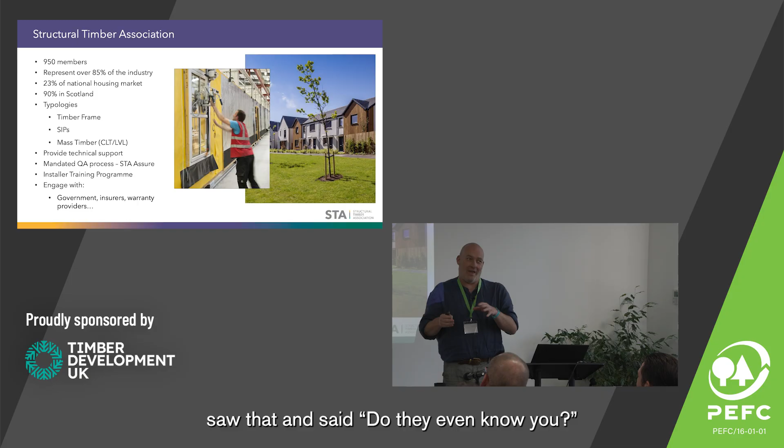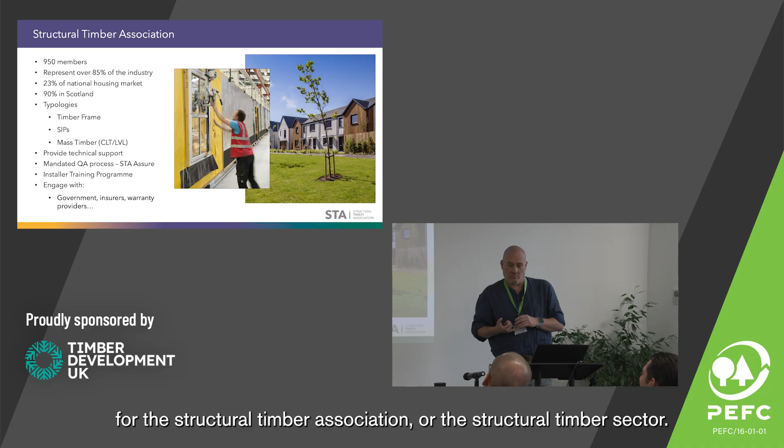Moving onwards. Structural Timber Association, very briefly, we are the trade association for the structural timber sector. Our membership are drawn from the supply chain, primarily the manufacturers, designers and constructors of timber systems. We've got a big share of the market in membership, as you would expect. And we represent the three main typologies: timber frame, SIPs and CLT.

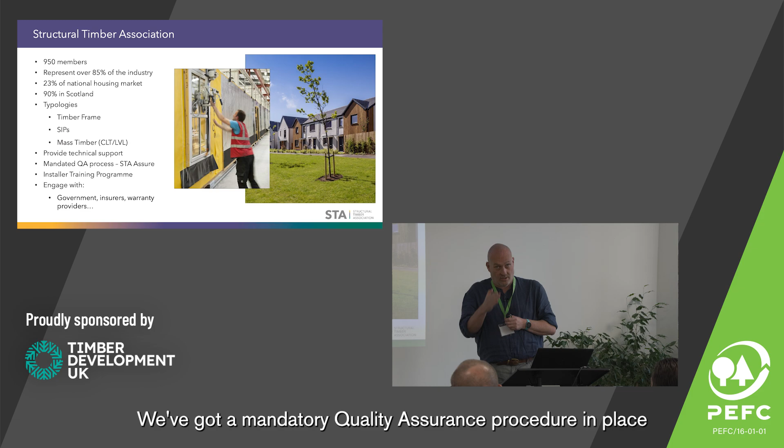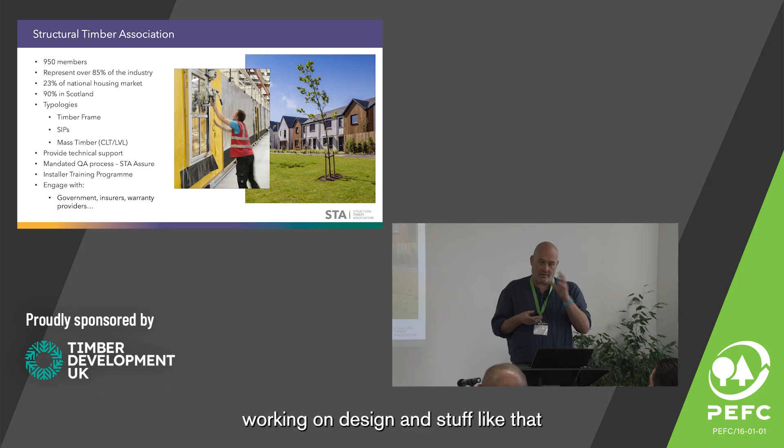We provide technical support to the association, some of which is through me, some of which is subcontracted. We've got a mandatory quality assurance procedure in place for members, which is ratcheting up in its ferocity from January, which is a good thing. We have trained installers for a scheme there, we're working on design stuff at the minute. And I suppose our mainstay is engagement.

We spend a lot of time trying to talk to government, don't always want to listen, don't always want to hear, but we try to spend a lot of time doing that and then link with the rest of the stakeholders in the sector. So I'm going to be talking about what's on the top two lines here.

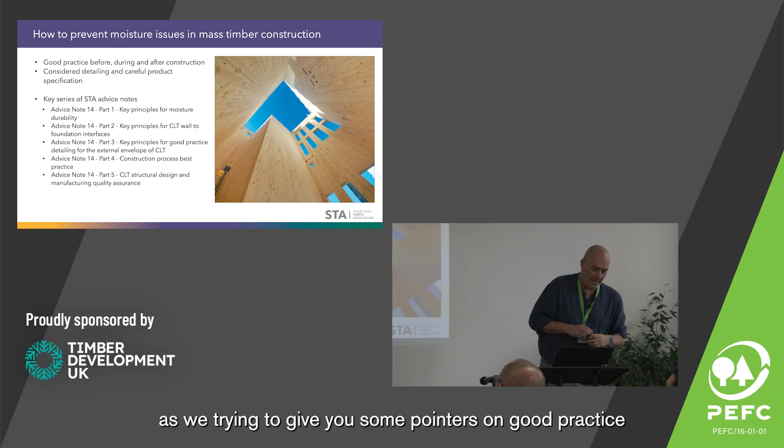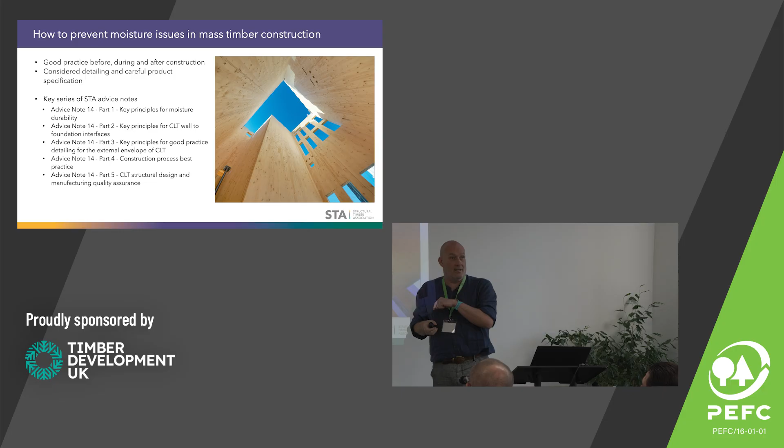Trying to give you some pointers on good practice and things like that. I'll point you at five publications that the association has written and prepared that will help steer you through this sort of thing, if you are not already aware of it. And now I'm going to get into the meat of the talk.

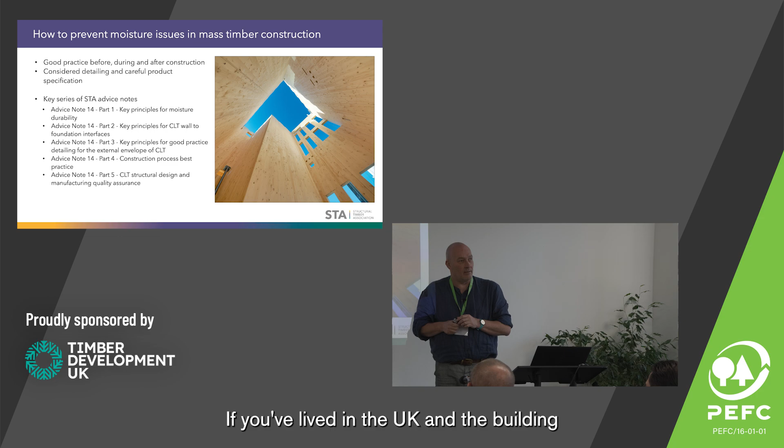So, stand up if you've lived in the UK in a building and you've never had an issue with water. And I've asked it that way because no one's ever going to stand up. We've all had some sort of problem with a leak in our building, and today is about trying to help you not have those problems, about help us not have those problems.

Some of this might be a bit controversial. I hope it's not, it shouldn't be. Some of it might be things that you're not doing at the minute that maybe I think you should.

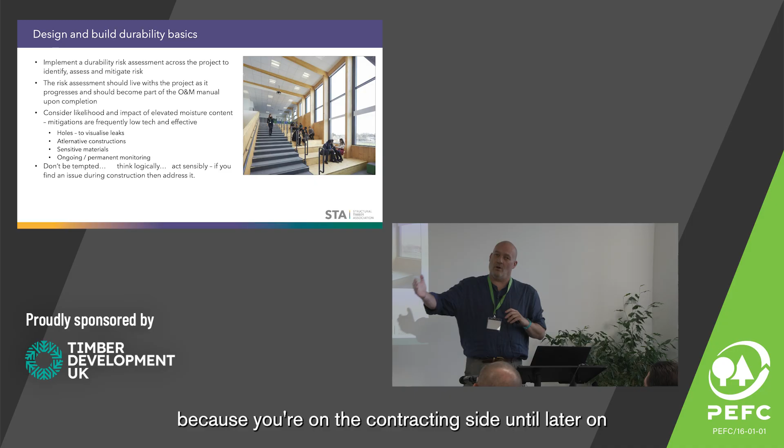Okay, first one, implement a durability or a design durability risk assessment. Start it at the very beginning of the project. So for some of you, you're not going to see this because you're on the contracting side until later on. Some of you that are on the client and design side, this is what should be in place at the very initiation of the project.

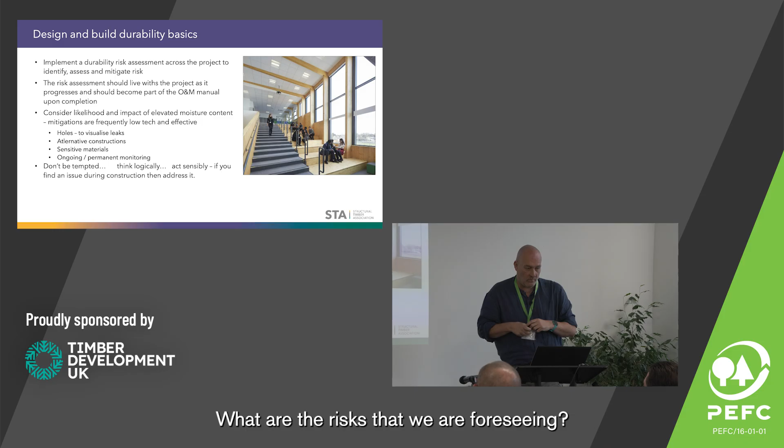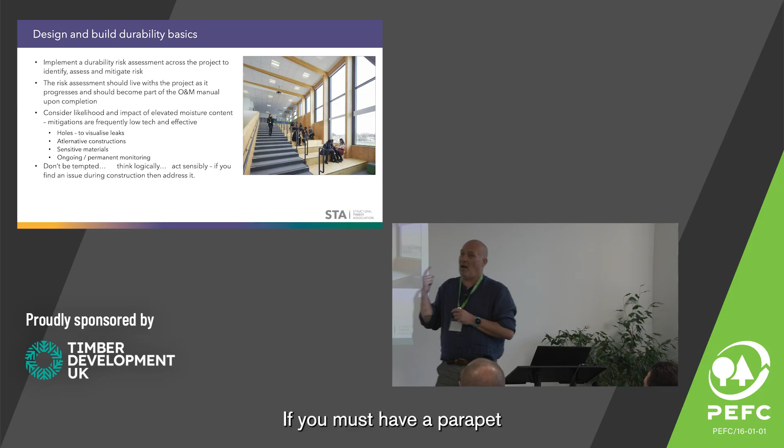What are we designing? What are the risks that we're foreseeing? What are the consequences? What can we do about those? A simple little example: we've seen parapet construction so far. We've seen how water can accumulate behind parapet constructions. Don't do it. What about if we just didn't design a parapet on the building? Have something else instead. If you must have a parapet because of the planning, for design and planning reasons, then how can we stop moisture becoming a problem in that area?

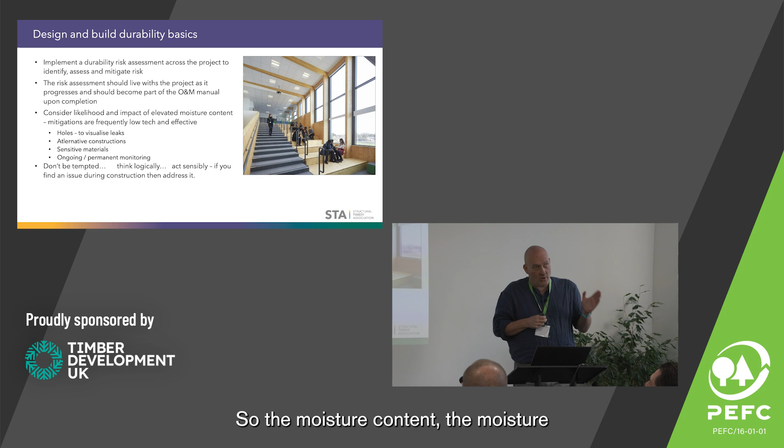So the moisture content, the moisture risk assessment should live with the job. Some of it will be moisture measurement on site, and I'll come back to that on the next slide.

So, on the basis that we're all learning, me especially, and we're all limited, some of us more than others, what about holes to visualise leaks?

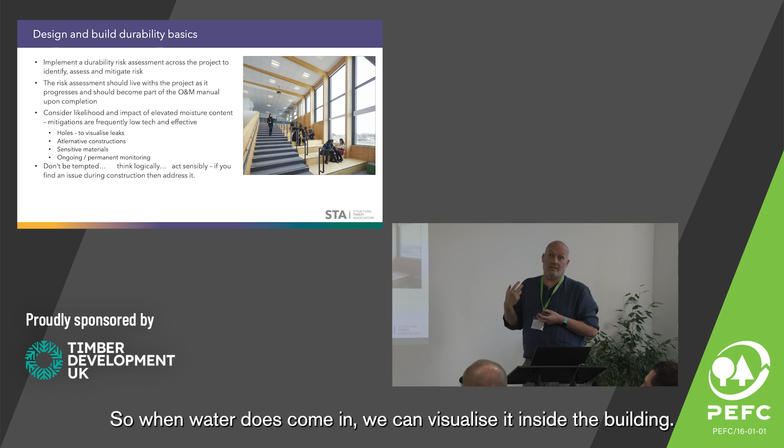If you're going to have a leak in a building, and we will, let's put a hole in the right place so that when water does come in, we can visualise it inside the building. We see a damaged surface finish, and then we know, hang on, we've got a problem, we can go and fix it.

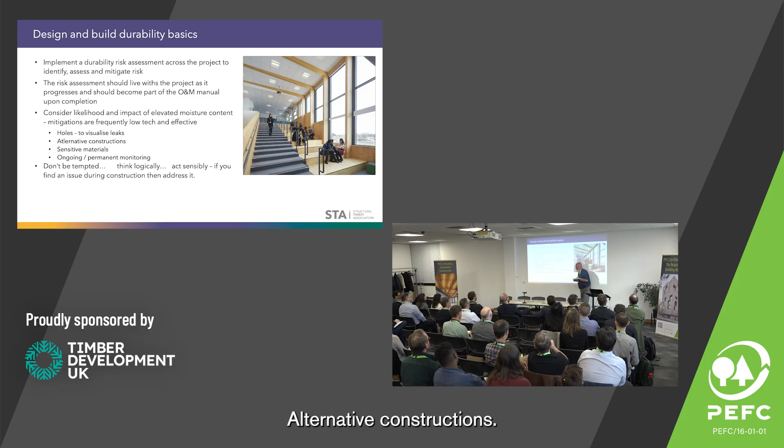Alternative constructions. So maybe don't use CLT for some of the areas that are most high risk. Use an alternative product in that area. I'll come back to that as well.

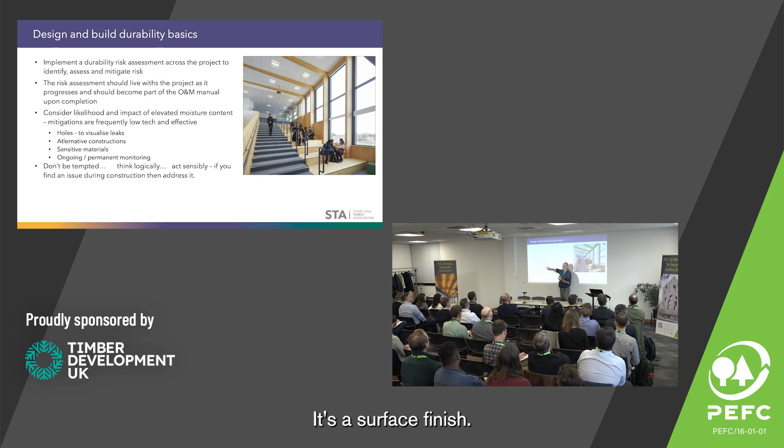I like this one. Use a sensitive material as a surface finish, something that's going to give you a tell. If I've got wet, I've displayed that. Maybe I've gone soft and spongy, so that you don't have to wait for whatever was on the roof of the building to tell you what's going on.

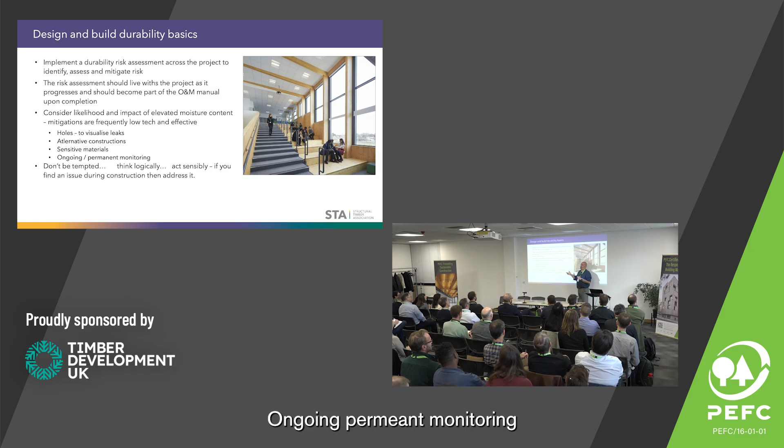Maybe, and I know some of you, this plays right into your hand, some of you, Mr. Sharples, ongoing permanent monitoring in the building. Something that lives with the building for many, many years, if not the rest of its life.

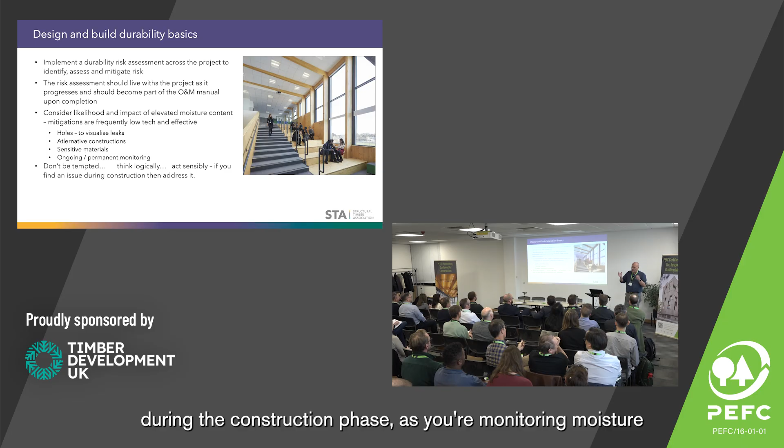And what I would say is, don't be tempted to take shortcuts. They will bite you. We know that, we've seen that. They will bite you in the bum, so don't be tempted to take them. Think logically in what you're doing and act sensibly. And that applies during the design phase, during the construction phase, as you're monitoring moisture. And I think if you're not monitoring moisture, you need your bumps feeling.

And then if you find an issue during the construction process, before you close up the building, address it. Keep CLT warm, generally. I know you'll all be going, yeah Paul, but how many times have you not done that? And how many times has it caused you problems?

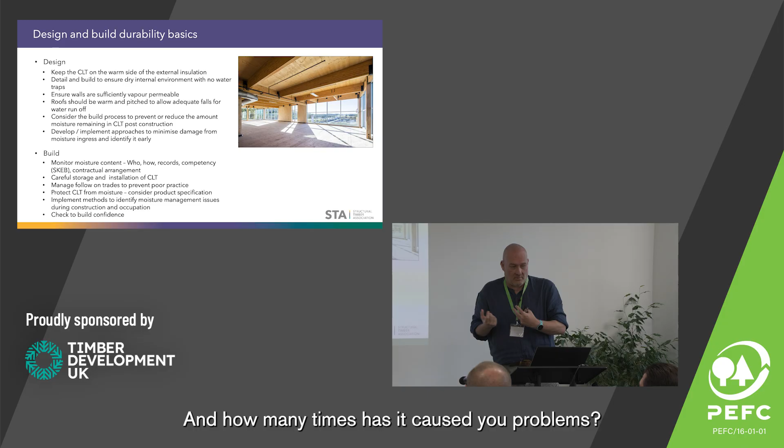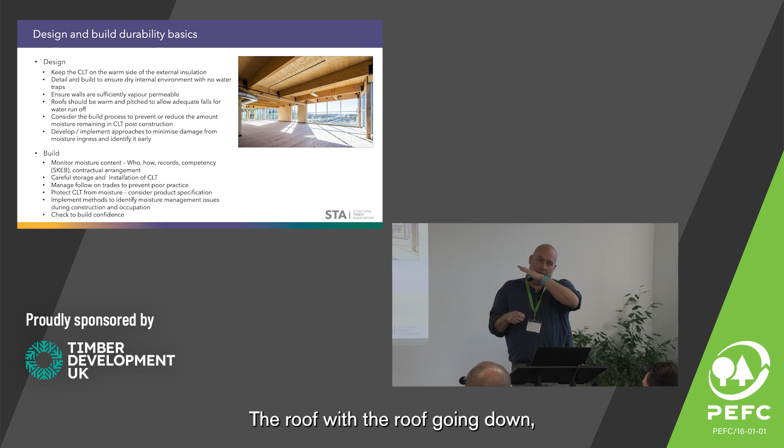And consider detailing to avoid water traps. Phil showed you a picture earlier with a parapet roof, with the roof going down to form a little valley. Perfect water trap. Water gets in there, tracks up the building.

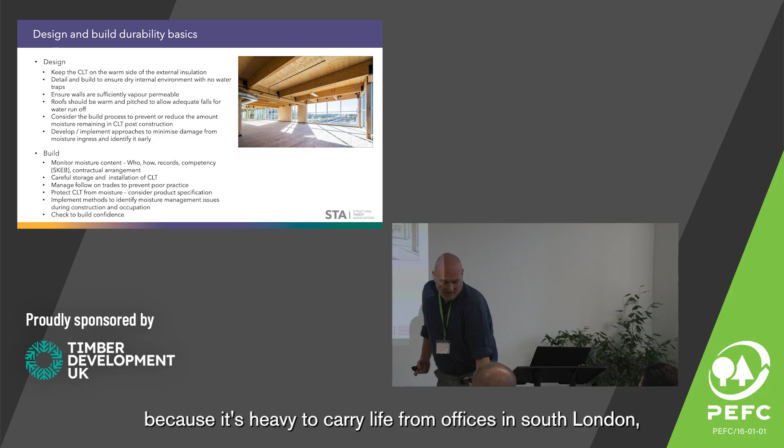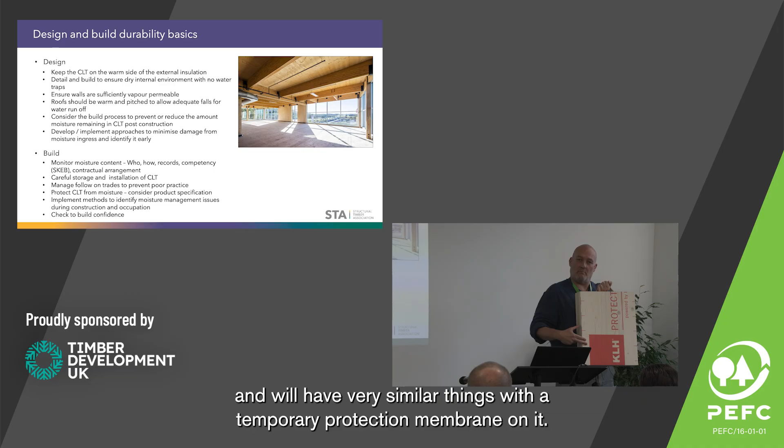Consider the build process to reduce the amount of water remaining in CLT post-construction. Now, I know he's not brought this here for my benefit, because it's heavy to carry all the way from offices in South London, but Nick from KLH, they've got this product, from KLH. And other manufacturers do exist and will have very similar things with a temporary protection membrane on it. Why not specify that on your jobs and make life simpler, reduce the amount of moisture that can get in, and also give yourselves a chance to get the building dry afterwards.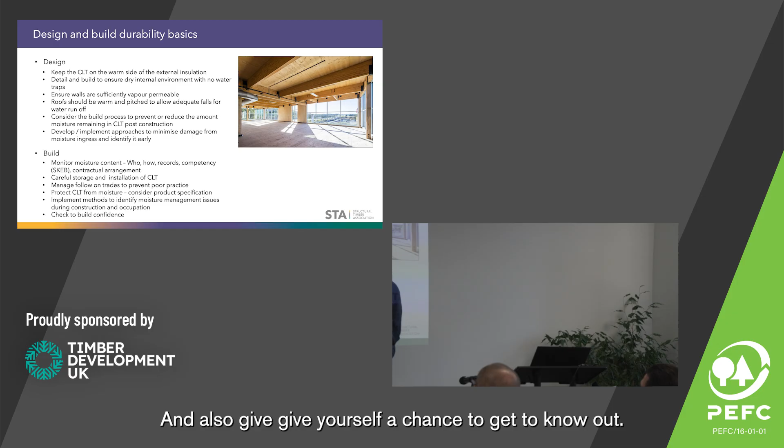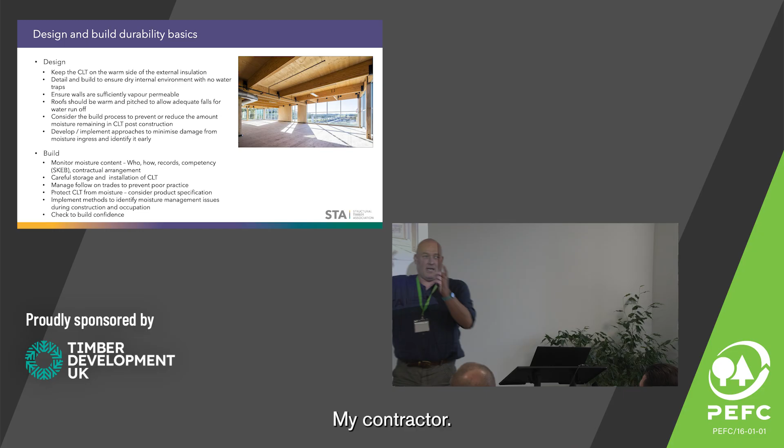I heard the words moisture management plan, I think someone called it earlier. Yeah, great idea. Who's doing it? So where does it sit? We've got some people in here from Opera who work on the client side of things. Should they be doing it? Should they be organising it? Is it something for main contractor? Is it something for subcontractor? Is it something for someone on the client side to be doing?

But when it comes to measuring moisture content, who's doing it? How are they doing it? Where are they doing it? What happens to the records? And the critical part in all of this is competency.

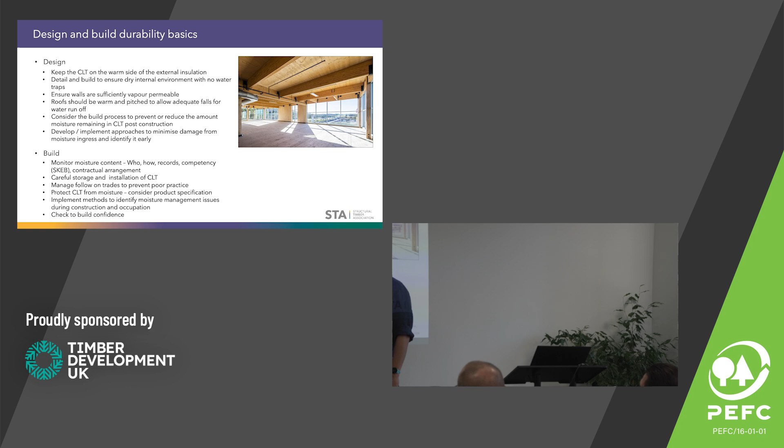So there's another, I'm trying to go around the subsets of people in the room. There's another group of people in the room who have spent quite a lot of time looking at CLT buildings with issues. You don't really want to employ them to do ongoing monitoring for you on a weekly basis because it's too expensive. So you need someone who's going to be on site on a regular basis to do it, but they need to be, so that they're affordable, they need to have the right skills, knowledge, experience and behaviour to do the job properly, and they could absolutely be trained by the other people in this room to do that for you.

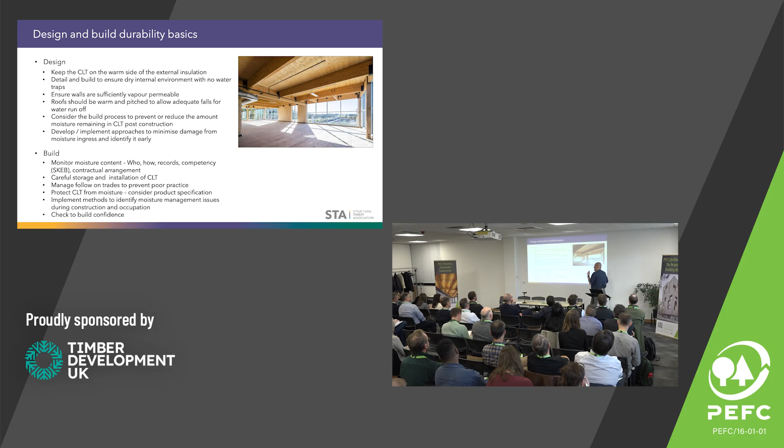If you check these things and find you haven't got a problem, then it builds confidence for you, for the rest of the team involved in the job.

Typical CLT external walls. Rigid insulation. Is that really a good idea?

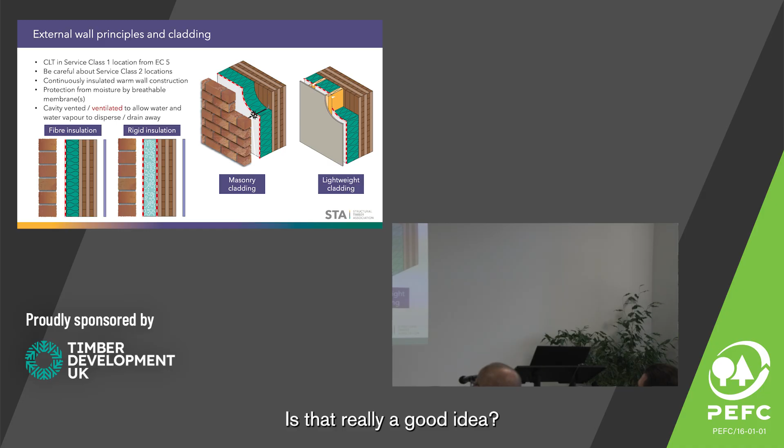If you are going to go rigid insulation, then I've got two membranes on this. One straight on the face of the CLT. These are breathable membranes in this case. One on the outside of the insulation. And on this version, with fibre, I don't necessarily need one there. In my head, that membrane's not that expensive. Get it on there to protect the structure during the construction process.

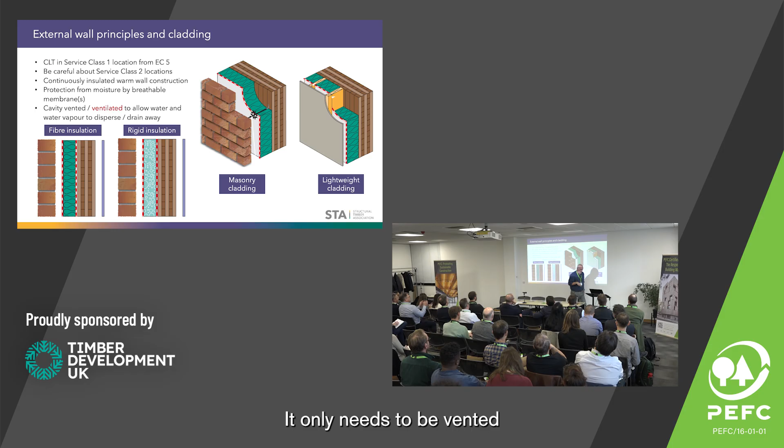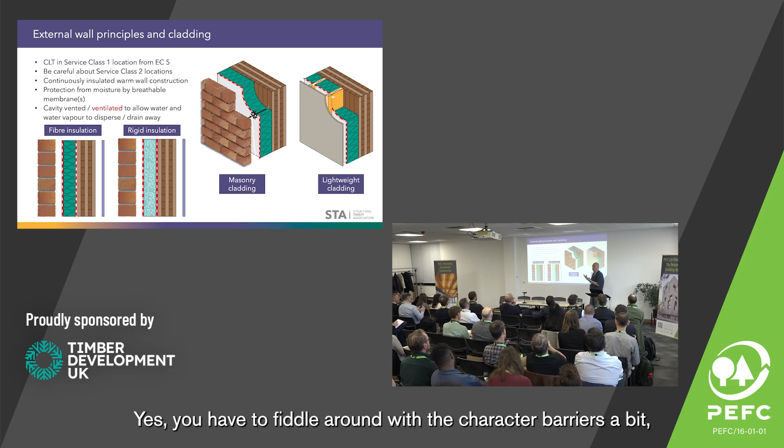Theoretically, if you've got masonry cladding, and I know a lot of buildings won't, but if you have masonry cladding, then it only needs to be vented. Add more ventilation to it, then you've got more opportunity for drying if it's needed, and don't take the risk. Yes, you'll have to fiddle around with your cavity barriers a bit, but it's a much better idea in my opinion.

You're going to get more opinion, you're going to get a lot of opinion from now, or some opinion.

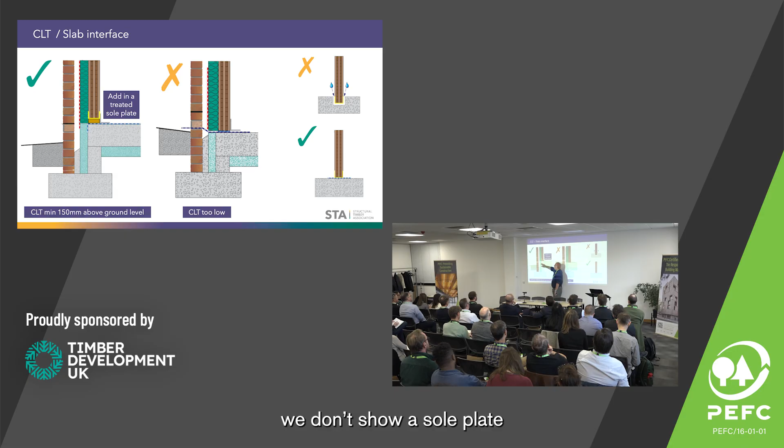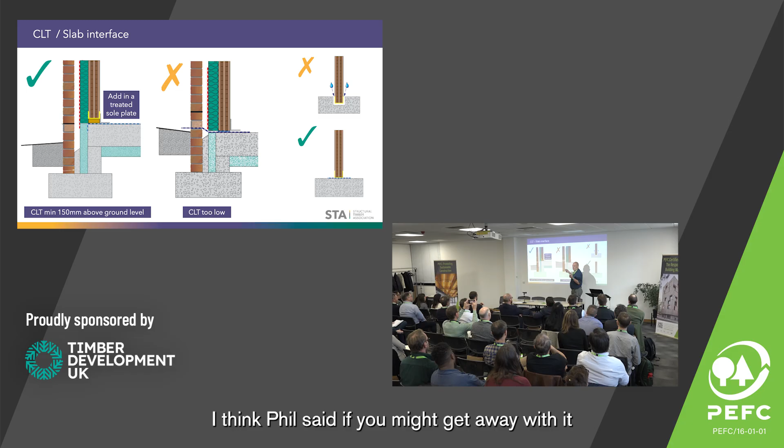In the STA publications, we don't show a sole plate. Why not? In my head, it provides an opportunity to set out the building, to level the building, and this is made from treated timber. I've already ensured that I'm 150 above the ground minimum, and I'm not doing it if it's less. Don't design it if it's less. This is not a good idea. I think Phil said you might get away with it, but you also might not get away with it.

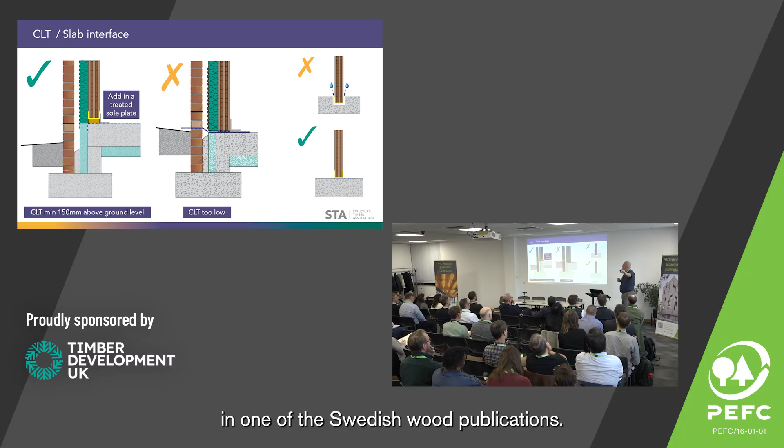We've heard about pockets from Martin. No, stop doing those. We at least want it like that. And then there was a nice illustration in one of the Swedish wood publications of a nice little metal plinth lifting a big column up. All of these things are a good idea. You might get away with it, you might not. You don't want to find out too late on in the process.

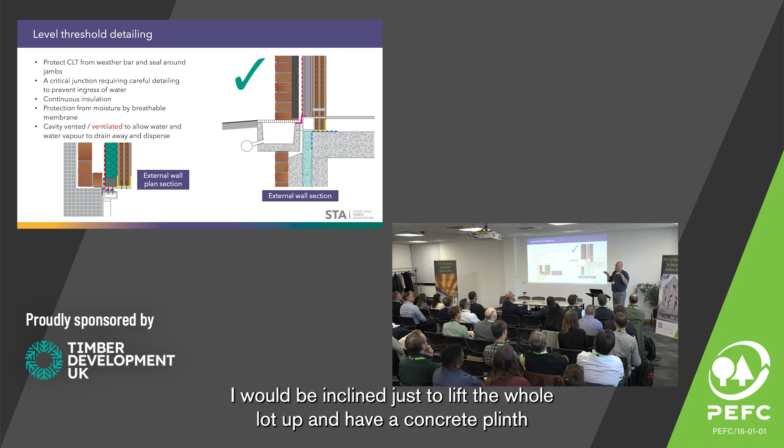Level thresholds. So this is an example of perhaps how you can do it to avoid a problem. But in my head, there's still a residual risk here. I'd be inclined just to lift the whole lot up and have a concrete plinth. It's a warm wall construction. I'm insulated externally anyway. I can take that insulation down past my threshold, lift the whole thing up, don't have a problem.

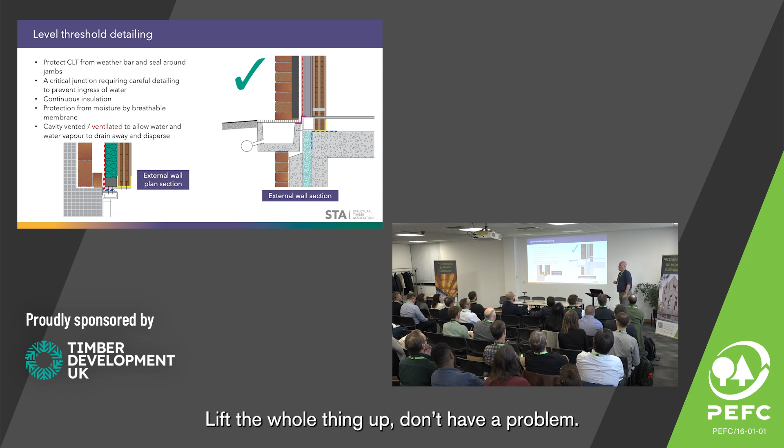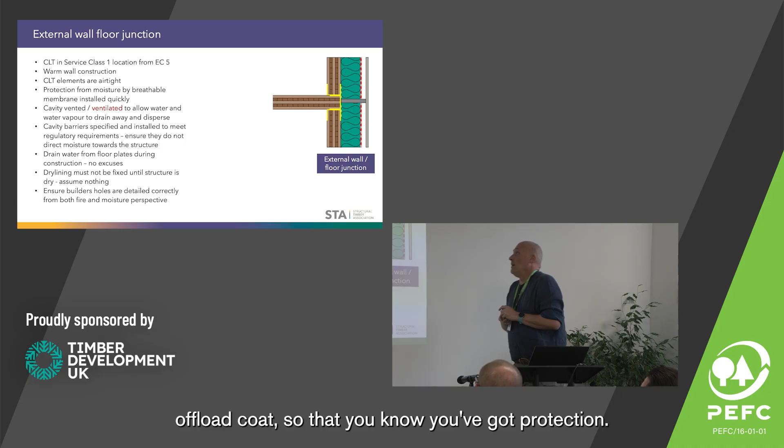External walls. You'll keep seeing my yellow lines here. Some of them are from the publication, some I've added in, because I think from what we know now, we want a bit more end sealing going on. Having the end sealing in position is a good idea. It can be done in a factory. Sounds nice, sounds controllable, sounds as though it can be quality assured. Or the alternative is you get someone to do it on site. If you're going to do it on site, you absolutely want to be doing it, in my simple little head, as the stuff arrives. Offload, coat, offload, coat, offload, coat. So that you know you've got protection to at least that area where you've got the exposed end grain, which we've heard all about is the absolute critical bit.

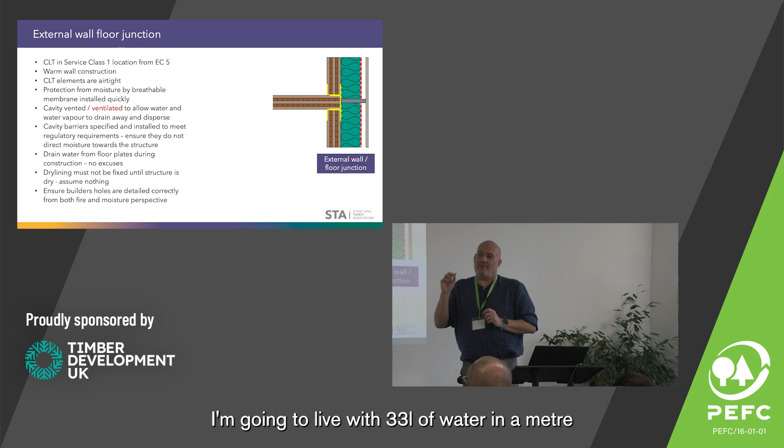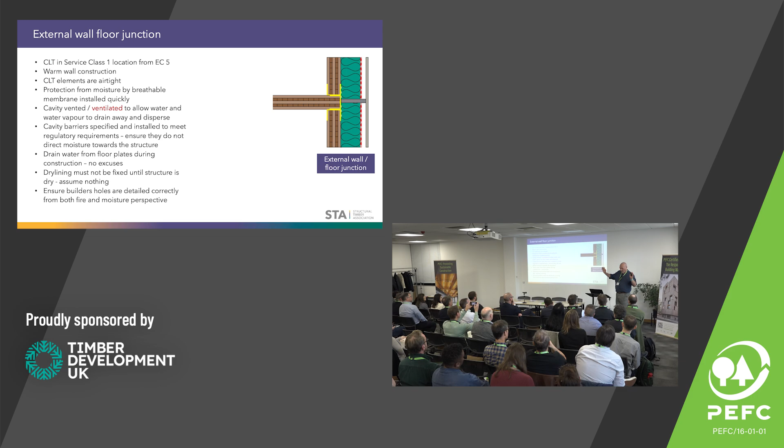I think I'm going to live with 33 litres of water in a metre squared of surface area of panel for quite a few years after today. That's a lot. Okay, start doing stuff like this, start following good practice, and you won't have that sort of issue. Key one on here, I think: don't progress. It's wet, stop, deal with the consequence and dry the thing out. If you're covering up wet material, you're going to get the problems that we've heard about earlier.

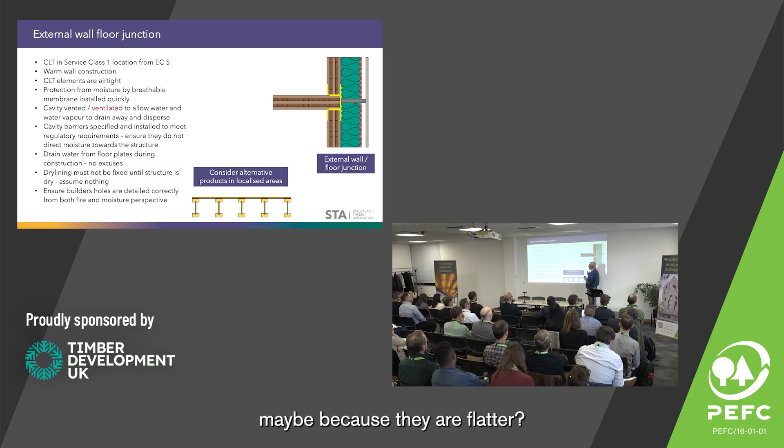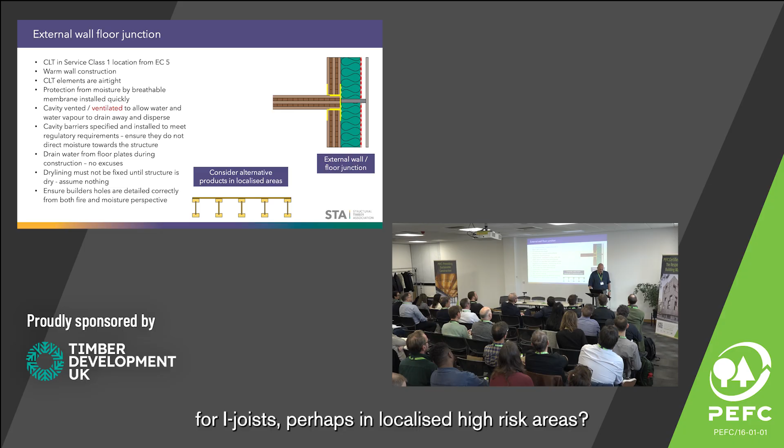How else can we do this? Localised areas. The areas that are higher risk, maybe because they're flatter, and this is a floor we're talking about now, or because perhaps it's a bathroom in a school. So can we swap out solid timber for I-joists, perhaps in localised high-risk areas? Or is this one of the places where we can include a sensitive material? Something that might be, if it gets a bit wet, it's going to go spongy straight away. So we've got to tell, so we know what's happening with the building.

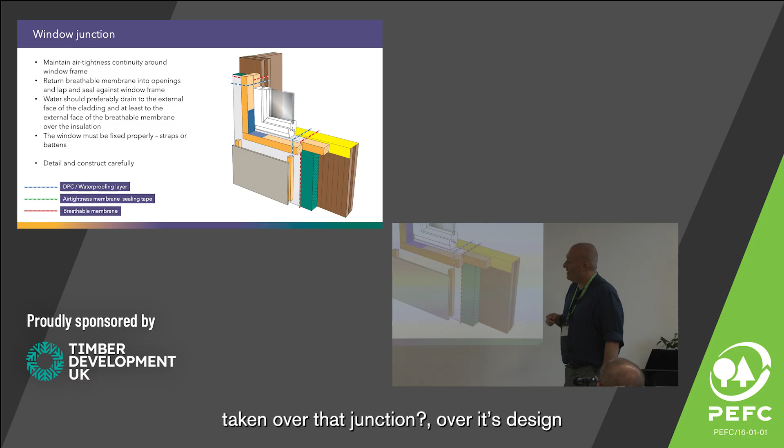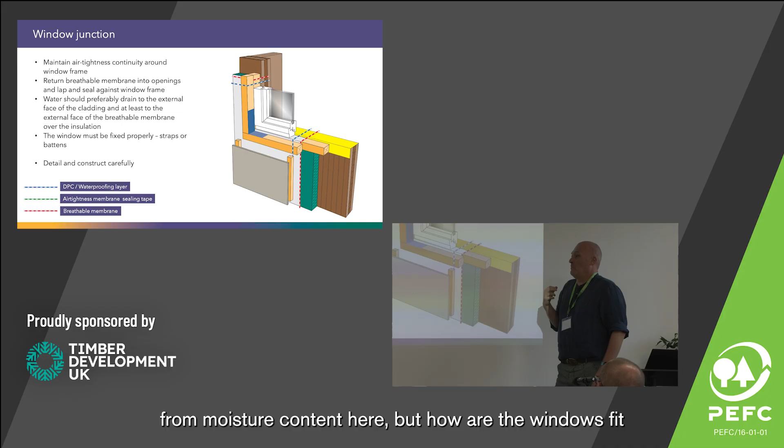Window junctions. Holes in buildings, fill them with windows. Is enough care taken over that junction, over its design, over how it's detailed, the products used, and then who's installing the windows, taking responsibility for that. I'm probably straying a bit from moisture content here, but how are the windows fixed? You know, silly little straps. Are the straps adequate? Have they been designed? Can it be shown to be adequate?

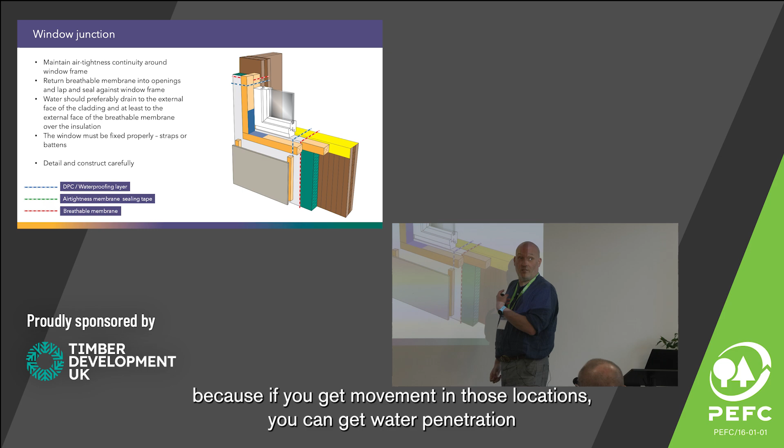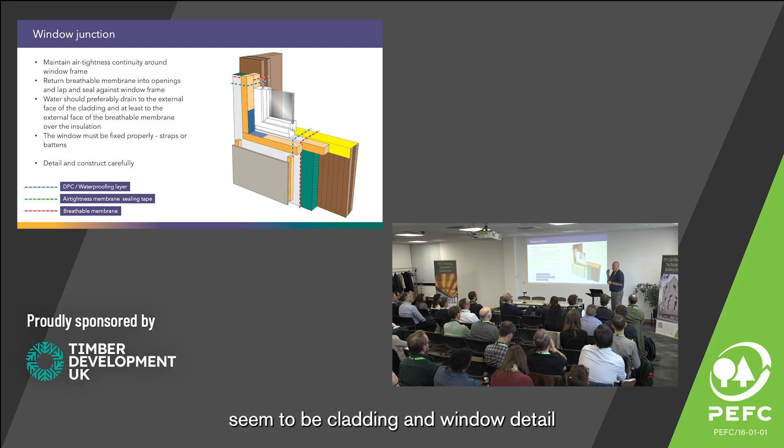Are we fixing to timber battens? Are they fixed properly to support big, heavy windows? And I suppose it is linked to moisture, because if you get movement in those locations, you're going to get water penetration. Have the window designed so that it's going to throw moisture outside of the building, or at the very least down a cavity, but preferably outside of the building. The challenge here, I would say, is an architectural one firstly, and then a construction one, because cladding and window details seem to be, to me, an endless source of variation. You almost don't see them the same. There's very, very little standardisation in place for that sort of thing.

So detail and construct this element—I should have put that up a little while ago—to throw water outside of the building.

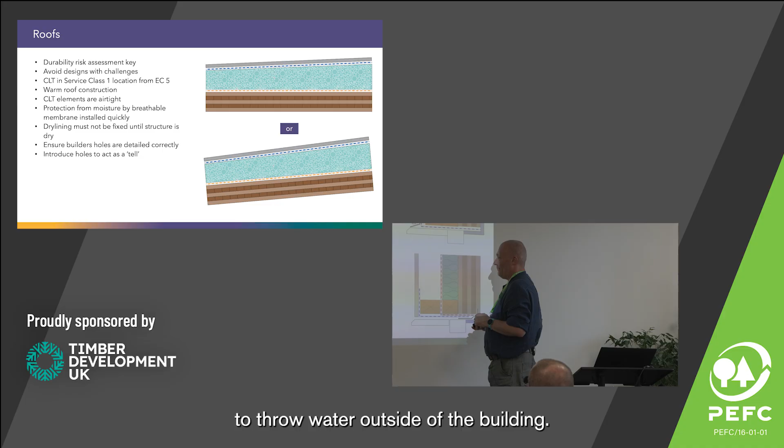Flat roofs. Yeah, you can do it. Do you need to design a flat roof into the building? Does it need to be CLT? Could it be something else?

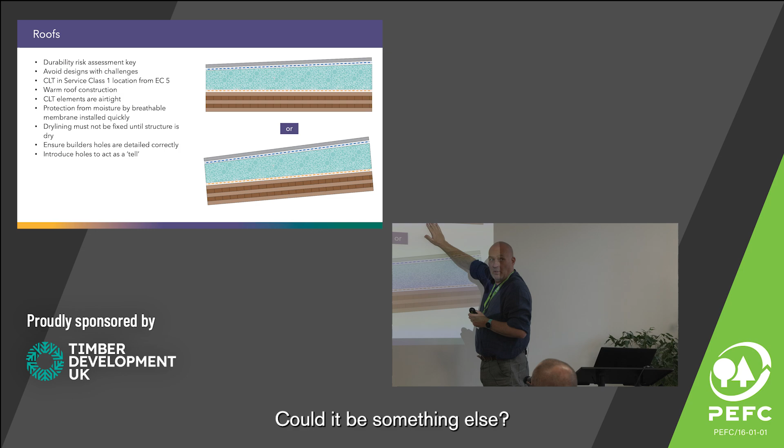Could we—and I know I've just rotated the thing in a bit of a clumsy way, but I'm graphically challenged, limited—put the CLT on a slope, and at the end of the slope at the bottom, put some holes in? I've got enough strength, a few holes big enough to let some water leak through. Isn't going to be a problem.

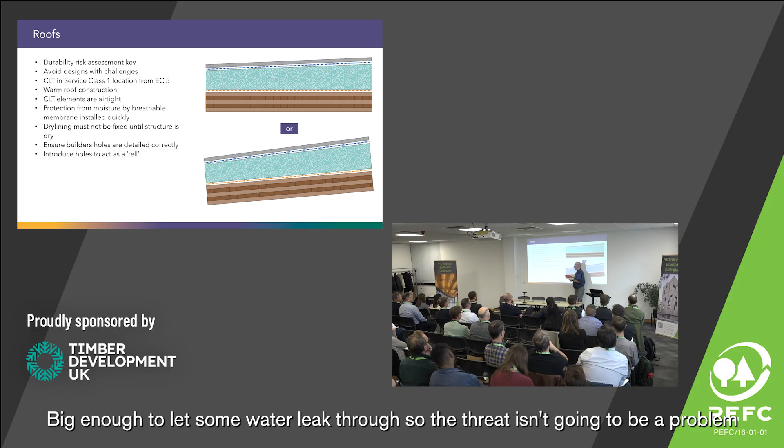I can even use those holes during the construction process to help me shed moisture out of the building. Put a temporary drain into them, some flat pipe or something, to get that moisture out during construction—because it is in the UK, because it will rain, it's not always going to be lovely and cold and crisp like today is.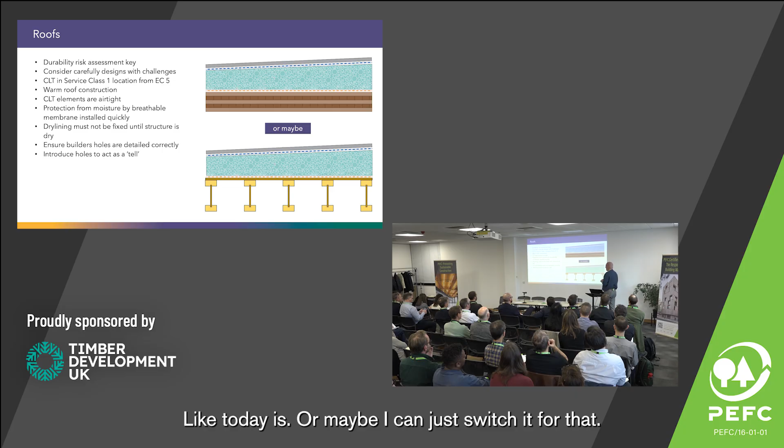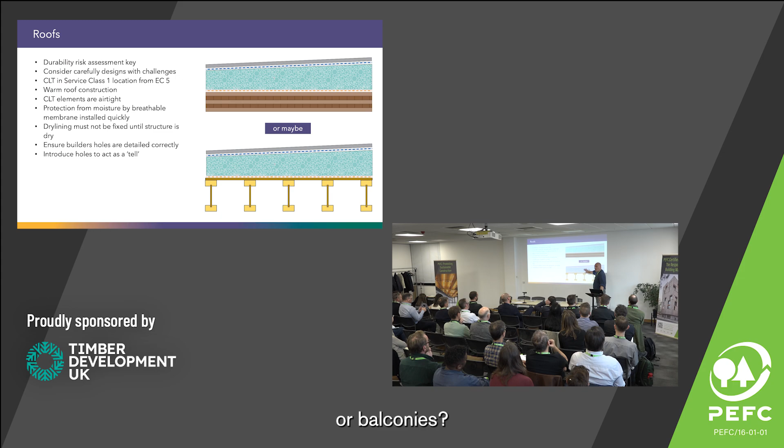Or maybe I could just switch it for that. And that doesn't just apply to balconies, it maybe doesn't just apply to bathrooms, but what about flat roofs? What about balconies? Is that another place where you might not want to use CLT? You might design something else, and it potentially isn't a timber material in that area.

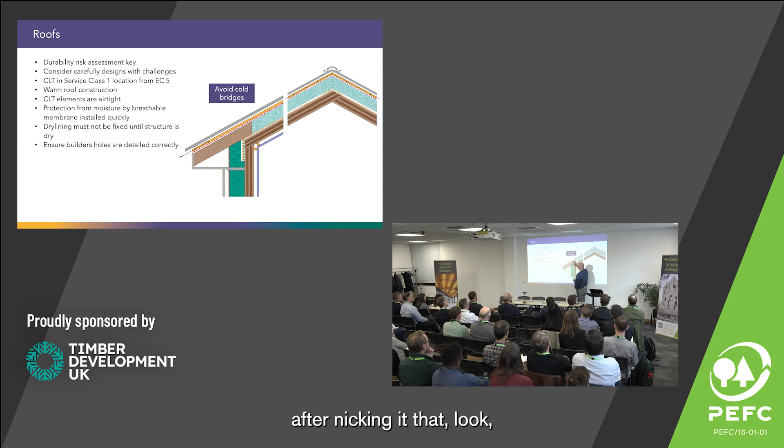Pitched roofs. I realised this after nicking it out of the book—a massive great big cold bridge there, unless you imply that that insulation is taken down.

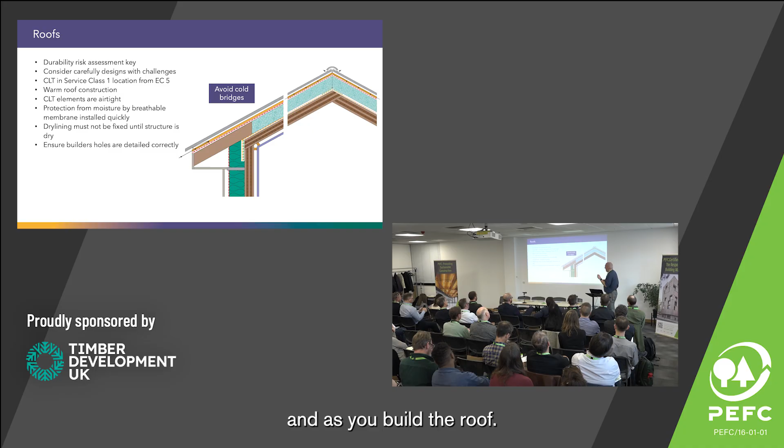So take that insulation down, and as you build the roof, get this membrane on as soon as you go—or use one of the clever temporary protection membranes that are now available in the marketplace.

That's me, just about done, I think. What have we done there? There we go, back to the beginning.

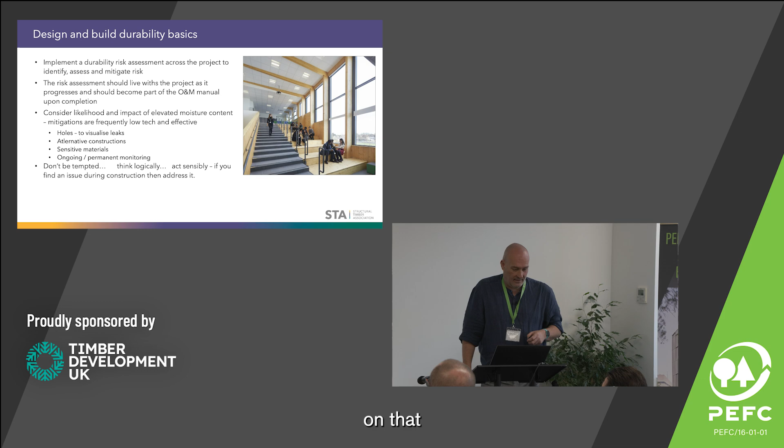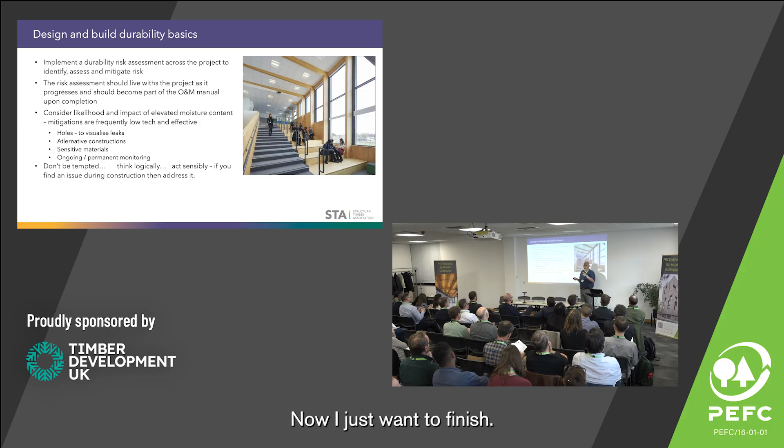Do this sort of thing: don't take risks, and think logically about the process. Now, I did just want to finish—I think I've got a little bit of time, because time's already blown. I'm looking to you to nod and join in.

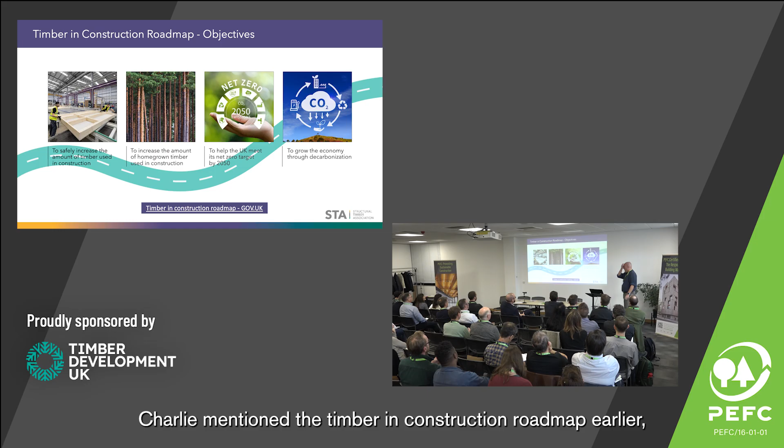I've given up now. Charlie mentioned the timber in construction roadmap earlier, and I think there's probably several people in the room who it has passed by somehow, who haven't heard about it, so I thought I'd stick in two slides on it.

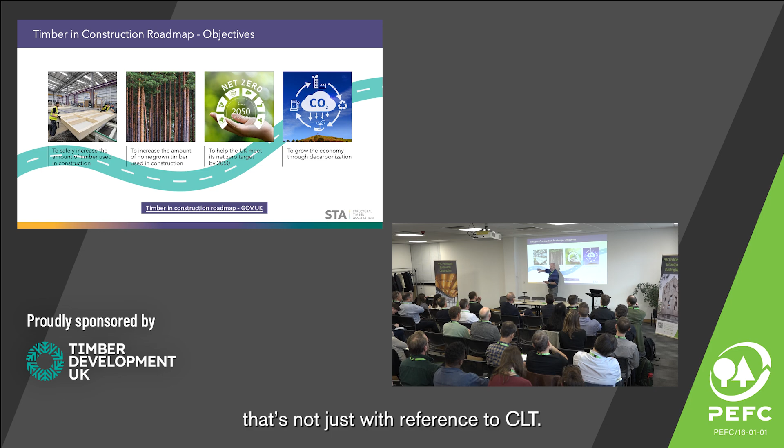The timber in construction roadmap is an initiative between government and industry. It was under the Sunak government. It looks now as though it's going to get buy-in from the new government—cross fingers, following the meeting the other week. It's got a few things in there, not just with reference to CLT or moisture, but some of the other challenges as well.

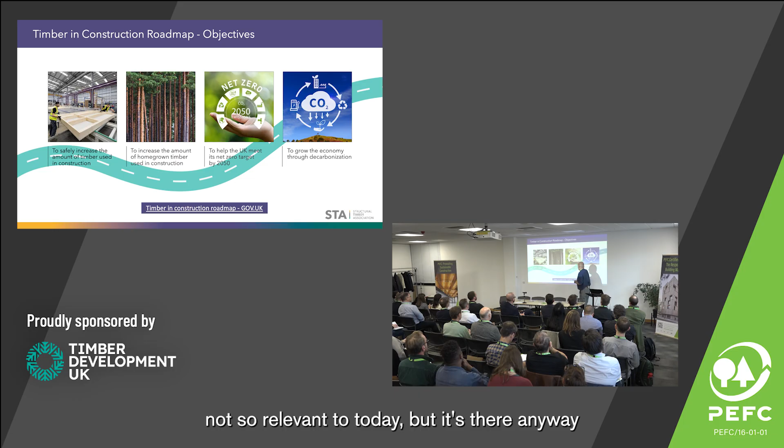Safely increase the amount of timber we use, increase the amount of homegrown timber—perhaps not so relevant for today, but it's there anyway—to help us meet our net zero target, which is why Part Z is critically important. We're not going to get that much further on operational energy, and then to help grow the economy through decarbonisation, through all the good work we're doing.

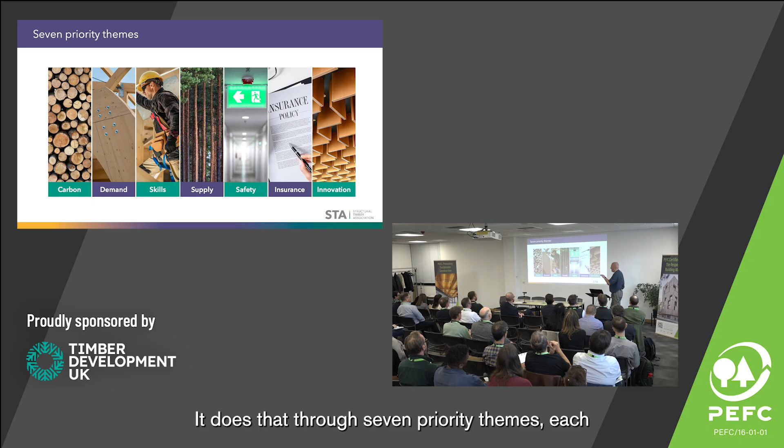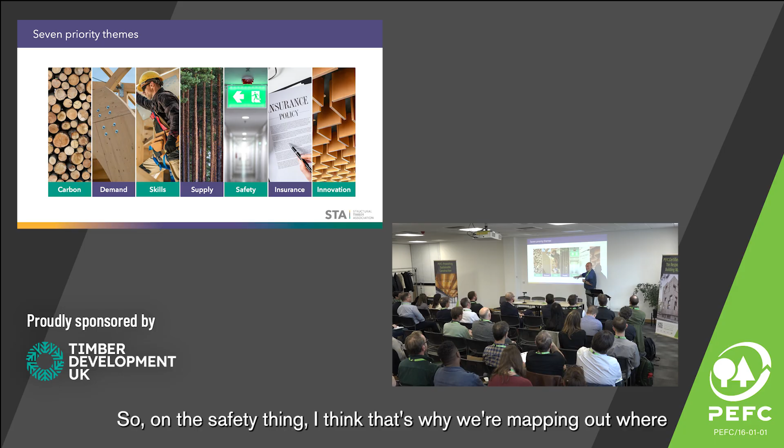It does that through 7 priority themes. Each theme has a list of actions underneath the titles. On the safety theme, I think that's where we're mapping out where all the CLT buildings are. On the carbon theme, it's improving the quality of EPDs that are available, increasing the number, improving the quality.

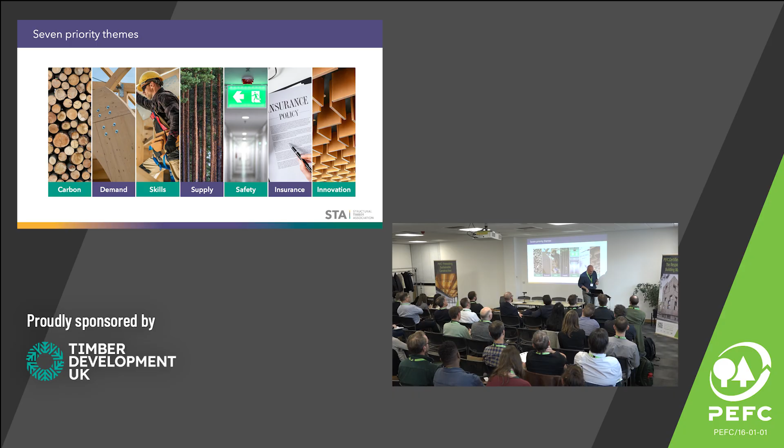Probably the biggest challenge in all of this is skills. Where are all these people coming from who need to construct buildings in the future? Years and years ago, I had a thing: the construction industry finds it hard to recruit because it's dull, dirty and dangerous. Working with CLT and other timber systems, I think we have the opportunity to change that.

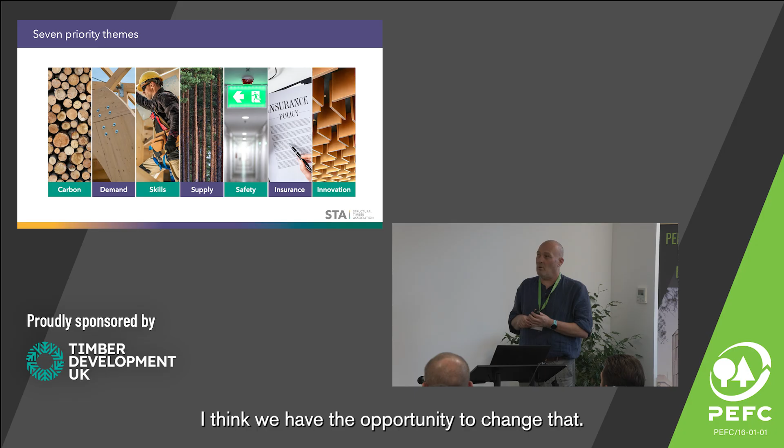That's me done. Hope that was useful, hope it was interesting. Thank you very much.